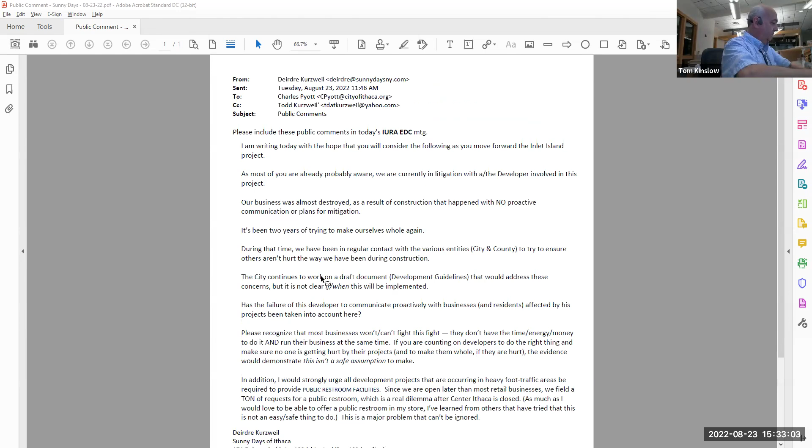Jeffrey. All right, is there more after that last line? Has the failure of this developer? Oh, yeah.

Okay, I've read the letter. Doug, Charlotte, are you guys good, give me a thumbs up when you're good. Good. Okay, great. Charles, let's make sure it's added to the record for the meeting and shared out accordingly.

Just before we go to minutes, does anybody on the committee have a comment or a response? Question? No. Okay, great. So we'll move forward then to review of the meeting minutes from July 19th.

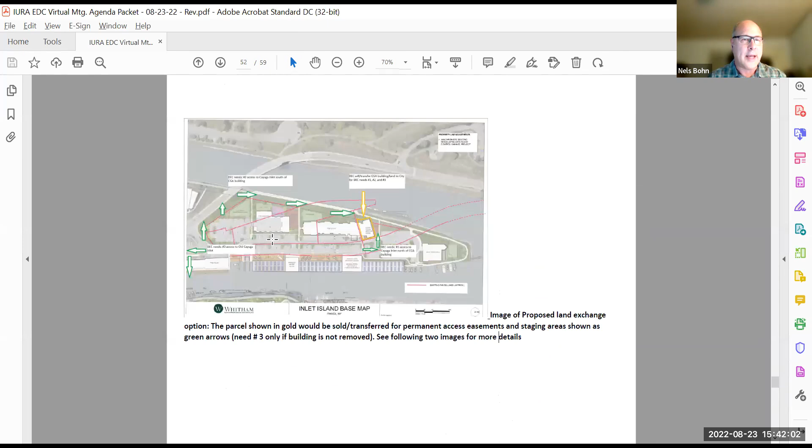Sure. So near the end of your packet, unfortunately, I didn't put it in sequence. But there is, I think it's on page 53. Charles is moving there. Yeah, those images, Charles, right there. Yeah, so on page 52 and 53 of the packet are some conceptual plans

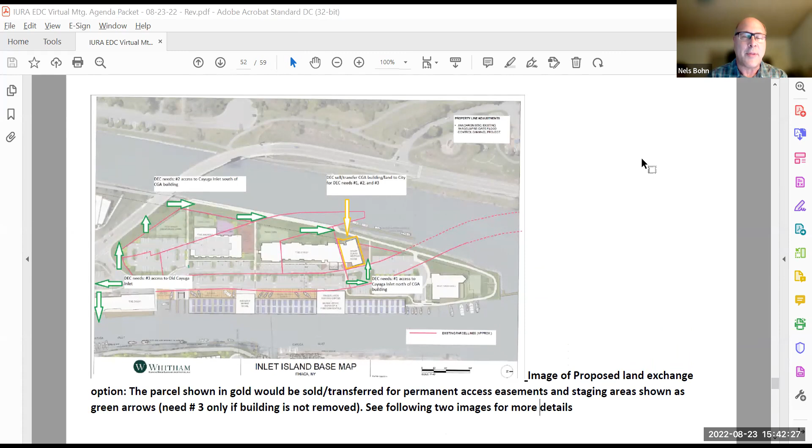which were utilized in discussions with DEC about how could the city acquire the property where the Coast Guard Auxiliary licensed the building for incorporation into the project. And so you can see on this plan that the yellow bounded area is essentially where the building is now. This is superimposed over an early version of the development program. And that DEC is open to transferring that property to the city for inclusion in the project.

They also have some of their own objectives they want to accomplish, which is to provide some logistical support for their maintenance of the flood control channel, as well as for some of the dredge activities that are proposed in the near future.

So conceptually, you can see here the boundary lines, where that boundary site is, where there's a yellow arrow going down from the top. That's kind of where the building is currently. But the triangle of land that the DEC controls goes north towards the point in a triangle fashion. You can see where those little green arrows are on the right-hand side of the image, showing where that triangle is. Charles, if you can advance to the next image on the next page, it'll show it in greater detail.

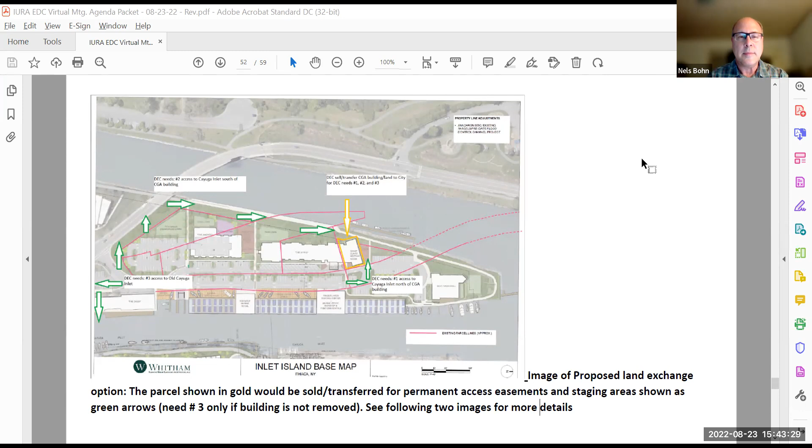So again, now we're looking at the island looking north, with the flood control channel on the west and the barge canal on the east, although we're only going as far east as Taughannock Boulevard in this image. The yellow boundary is the current building license to the Coast Guard Auxiliary. On the left-hand side, shaded, is the 25-foot wide DEC maintenance easement that runs all along the flood control channel. At the very northern end of this image is where the Boatyard Grill is, with the parking lot between the Coast Guard Auxiliary and the Boatyard Grill.

So what DEC is proposing — well, I should say they're open to a transfer of property at a fair exchange of values. Oops, what happened there? We shifted around.

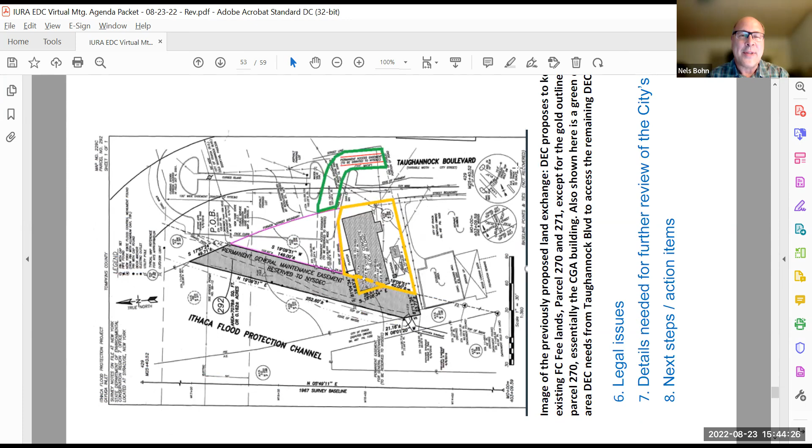What they would like is to retain a portion of the site for logistical purposes and convey the yellow bounded area to the city. They would also want any encroachment of the existing building into the easement removed, which would probably require partial or full demolition of the building, so they'd have a full easement area open and unimpeded. Secondly, they would gain an access right somewhere else on the island on the barge canal side for dredge purposes, which would be on city property, not developer property.

So this discussion has been moving forward positively, and I think it's likely we can come to some agreement, but there are details that need still to be worked out. The state also has a process for property transfer, so there's a timeline associated with this once conceptual issues are agreed upon. But generally speaking, the DEC indicates that there could be a fair exchange, which may not involve a whole lot of dollar exchange, if the value provided to them is equivalent to the value of the building.

In other words, by removing a portion of the building in the encroachment area and by the city providing an access easement to the barge canal system, there may be a very close to fair — a $0 exchange, or a very modest exchange amount. So that's a positive aspect.

The questionable issue is making sure that the DEC-acquired portion of the site doesn't somehow detract from the overall development of the island, because their interest is in logistics and maintenance issues, while we're trying to upgrade the entire experience of the island. So there's a little bit of a potential mismatch there, and we're trying to make sure we can work out those issues.

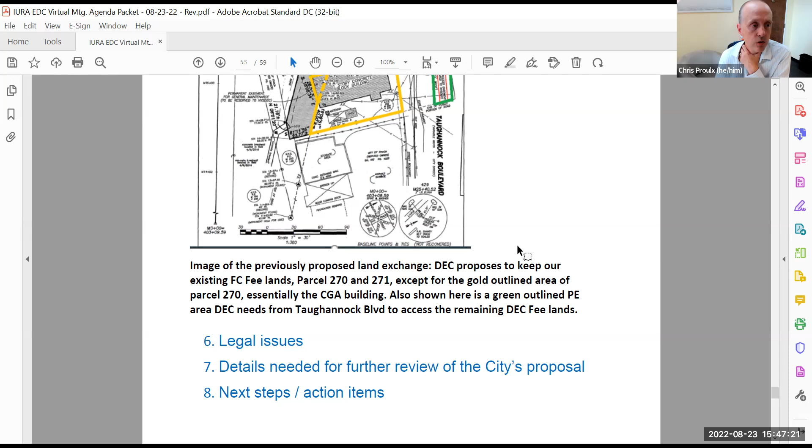So can you just clarify, with everything you just said and the image on the screen here, who owns what currently of the gold and the pink? Charles, can you bring that down a little bit? Okay, so the state of New York owns the entire yellow area of the site boundary, as well as the purple area. So it becomes a very tight triangle — wide where the building is, and it comes to a point at the north. That's the parcel we're talking about when we're talking about the Coast Guard Auxiliary parcel.

Okay, so the state owns that, and so there's not really an exchange here — what they're willing to do is sell us the yellow and retain the pink or purple. Correct. But they would offset the purchase price based on the cost to remove the infringement into the easement, that portion of the building that intrudes into the flood control channel, and also provide recognized value access to another part of the barge canal through city property at the southern part of the island.

There's also a former building foundation just south of the marine building, not detailed on this plan, shown just immediately south of the Coast Guard Auxiliary property, which also infringes into the easement. It's only a foundation wall at this point, but that could be another value to the DEC to remove it from the flood control easement, because they essentially try to treat the flood control easement area as having no vertical features at all, just grass.

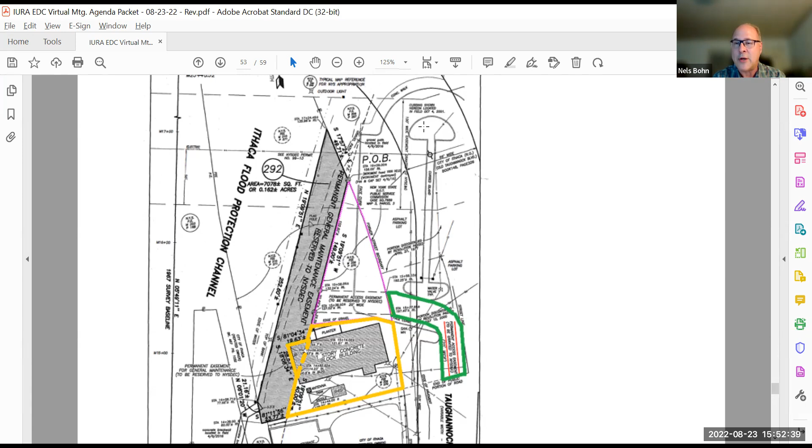Do you have a timeline? I know we're dealing with the state, so it's unclear, but does the group working on this feel there's a working timeline, or is it still obscure? They got back to us with some detailed proposals just last week, and I think we can respond - we did respond that there were some concerns about one aspect of their proposal. But we are going back and forth, and we've had very good cooperation from the regional director involved in the discussions. I think we can make progress fairly quickly, given that it involves a state agency, a municipality, and a developer all in the discussions.

Okay, great. Let's give the development team a chance to chime in here on anything related to this aspect before we go look at your program in depth. I don't know, Steve, I know you've been involved in this too.

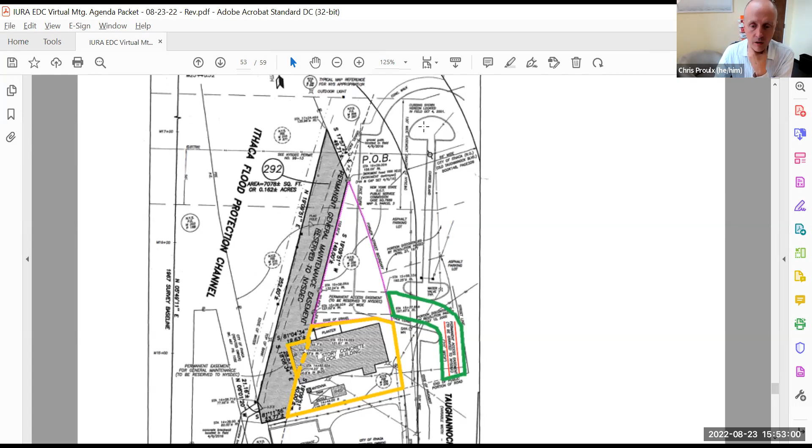Yeah, there are a couple of things. I think it was understood in our meeting with the state and the DEC that lopping off a corner of the building really wasn't feasible, and that essentially the whole building would have to come down.

And the easement, certainly as I envisioned it, and apparently this is maybe an issue we have to discuss with the DEC. As it exists now, there's already a curb cut and parking there, and the use of the easement is for access. If the DEC plans to use that parcel and remove that whole triangular spot, that essentially removes egress from the Boatyard Grill, let alone a bunch of parking, then we have a problem.

I kind of doubt that's really what they need to do, and I'm confident they'll work with us, but that commitment would have to be clarified before we could proceed. The building itself would have to come down, and that has a bearing on the value of the property, and there are a lot of negotiations before the city would even commit to transferring it to us. That also presents a timeline issue as well as a planning issue, in terms of what we can actually do with the site.

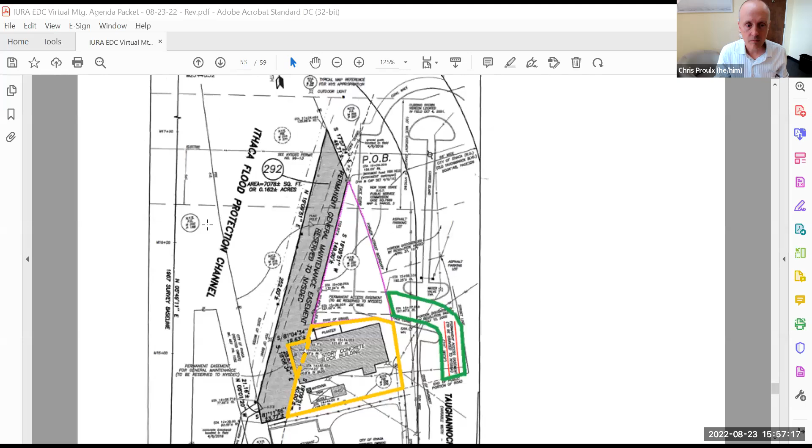Okie dokie, so let's then move to C, unless there's any other questions on B at the moment. It sounds like maybe the best thing is to turn it over to Jacob. Are you going to drive us through the changes to the submission? Is that what we're going to do here?

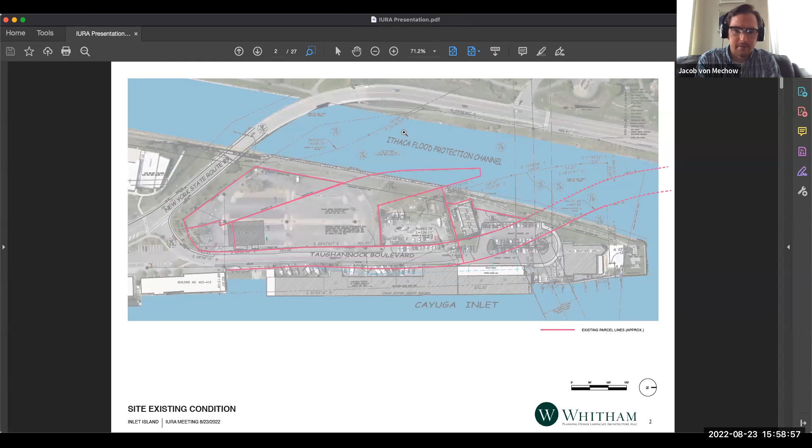This first slide shows some of the existing property lines, which are obviously a bit out of date, given that they predate the Ithaca flood protection channel. But for reference, they show the general footprint of the parcels that are for sale on the site and the existing Taughannock Boulevard right-of-way. Next slide.

So the main constraints, as many of you are probably already aware, are the New York State DEC easement for the flood control channel on the west side of the island, and then also the NYSEG easement, which is also a fairly major legal constraint as well as a physical constraint with those existing overhead power lines. These are some immovable constraints on the site. So next slide.

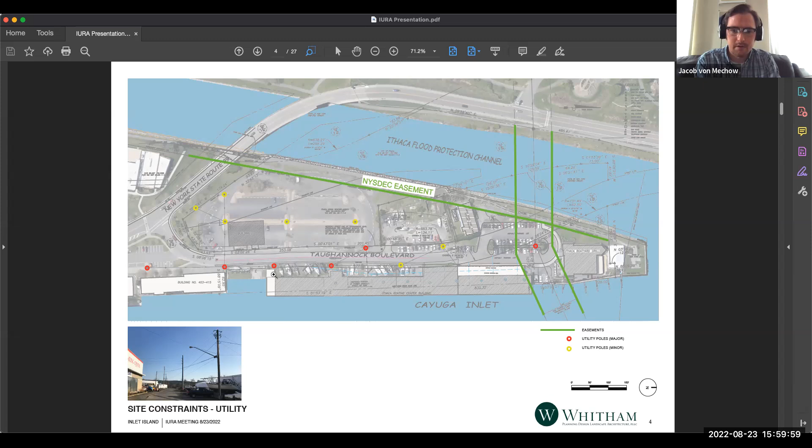We also have some infrastructure on the site that we are currently operating under the understanding is not financially feasible to relocate—that's the utility poles shown in red. However, there are some other utility poles in yellow that we think are simpler to modify or work around. But the ones in red are probably not going anywhere as part of this project.

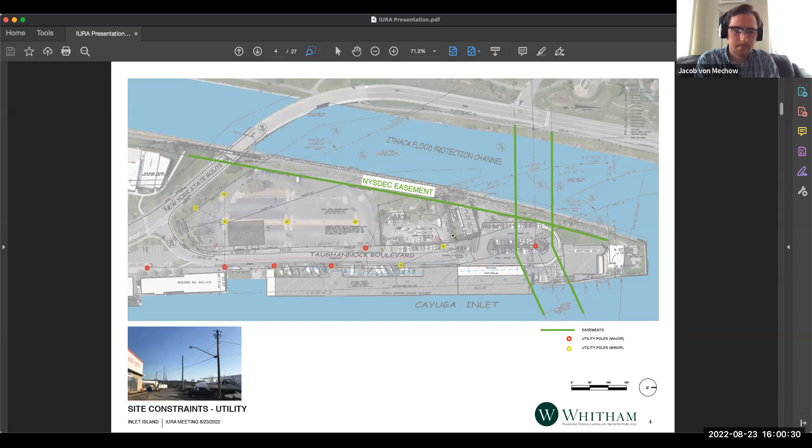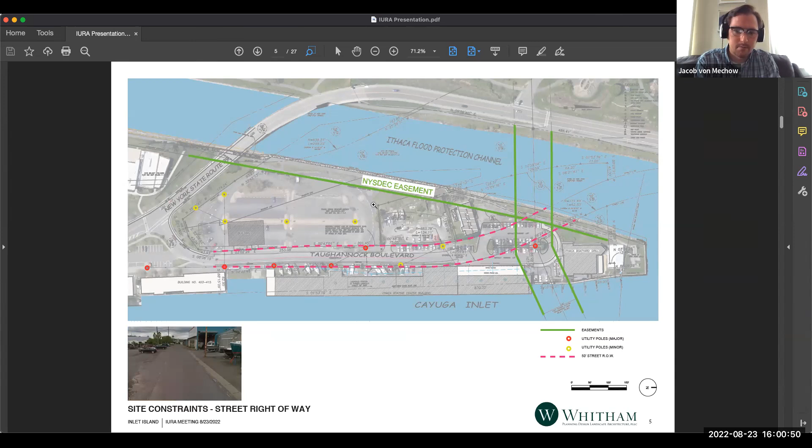Those poles flanking Taughannock Boulevard create a real constraint to the width of the road and its alignment as it enters the site on its existing footprint. This is the 50-foot street right-of-way, approximately—I say approximately because it's not consistently 50 feet wide. That's the standard city right-of-way for a street, but the old Taughannock Boulevard right-of-way doesn't follow this. Just for reference, this is the shape of it.

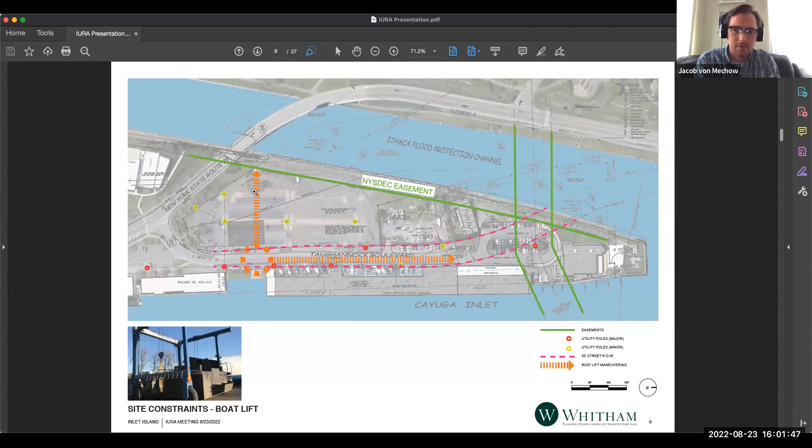We also have some operational constraints. One of the main goals of the development is to maintain and not impair the existing working waterfront operations of the boat yard and boat storage shed. The lift itself has real width requirements for where it moves and operates. It needs to be able to make its way up the existing Taughannock Boulevard to the maintenance shed located right there. We're also showing an east-west arrow indicating where, as we get into the site plan, we need to move boats for temporary surface storage.

As we just discussed, the DEC access and staging area is shown—this is approximate and still in conversation. The area below that, in blue, is space necessary not just for the DEC access but also for emergency vehicle turning at the end of the right-of-way, and that's incorporated into portions of the parking lot that exists at the north end.

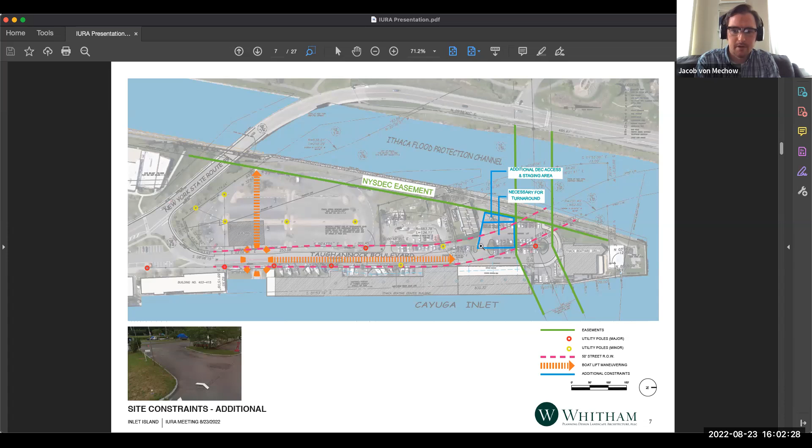So we're anticipating that those constraints provide us with a remaining available development area, shown in purple, that's left over once you account for all of those very real constraints that limit the development area here.

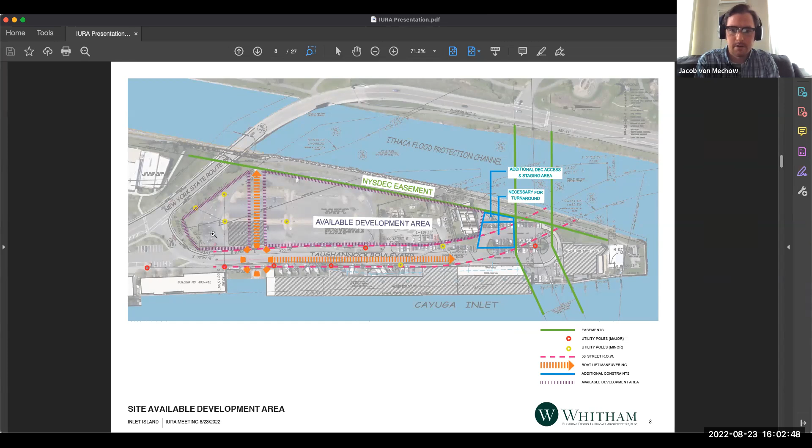With that in mind, we have some changes to the conceptual development plan. As you can see, a lot of this is very similar to what we showed before. However, we've made some adjustments to some of the drive lanes and footprints.

One of the major changes is the demolition of that existing building on the DEC parcel, and how that impacts the hotel building, or what we're calling 'the stays' currently. That footprint has shifted a little to reflect an ability to move further north, opening up more space toward the south end, and also some shifting of the second half of the building closer to the water to add a little more interest to the overall building mass and footprint.

The anchor building has also been shifted a little bit. We have Tom Kinslow here from Alt—they've been working on some preliminary programming and design for floor plans for the INHS building, which we're calling the anchor here as just a temporary label.

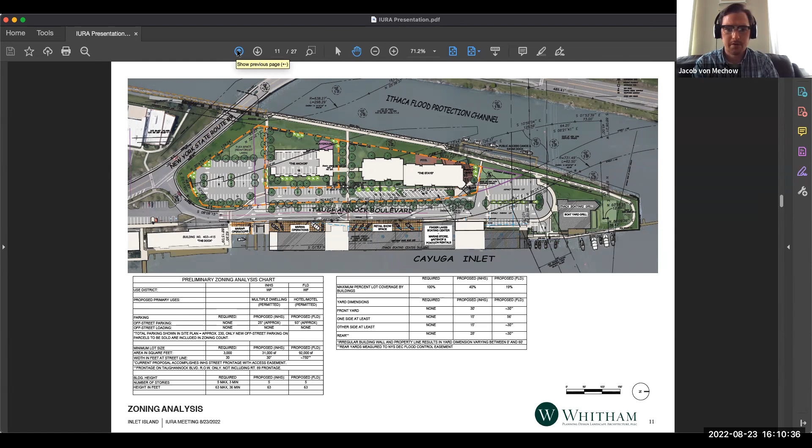One other thing I would point out: in previous plans, we were showing solar panels on the roof of the boat shed building. After a feasibility study, it was determined that the existing structure was not going to accommodate those, so we're looking to offset that with off-site investment in solar. Unfortunately, the existing boat shed structure just won't accommodate solar.

Nels, I think I see your hand raised—is that what that is? I just wanted to clarify, you mentioned in the proposed pedestrian improvements, it seemed like some of the lighter colored blue, which was the proposed improvements, went along the existing waterfront promenade trail. Are there proposed improvements in those areas, or is that just identifying that, or maybe my color sense is a little off, but it seemed like those were areas that were light blue.

Yeah, that's a good point. There is, on the west side of the site, particularly along the top of that seawall and by the existing boat dock, the floating dock, an existing trail. However, it's more of a rudimentary stone dust trail that is not particularly well maintained, but it is there and it is serviceable, and you can use that to connect from the asphalt waterfront trail extension near the gym building, underneath the bridge and up all the way to Lookout Point. So that is an existing connection.

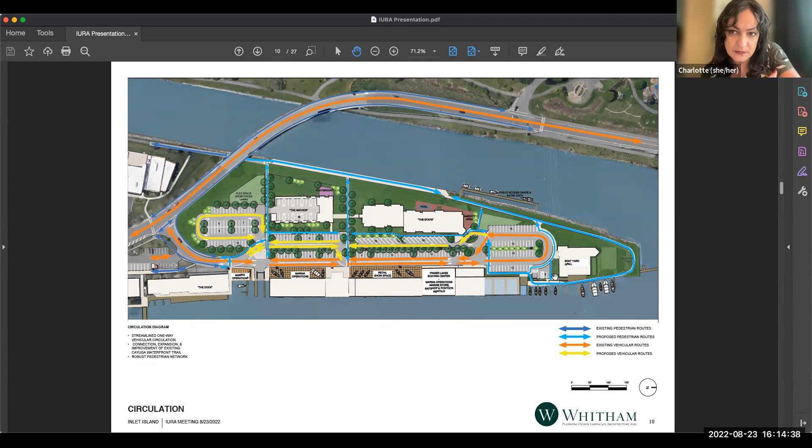We had shown some additional space around the exterior of the anchor building as public amenity space, but as Lynn said, there's nuance to what can be public and private depending on ownership and control. So at the moment, we've backed off from getting too specific in the programming and design of those spaces until the programming and function of the buildings is farther along, as far as where door entrances and exits are and who has access to what. But to your point, Charlotte, yes, we had shown a public playground, and we're backing off that until we fully understand how much we can give to the public and how much is inaccessible in terms of program.

Okay, yeah, thanks for the clarification. I know we looked at a lot of versions, so I wasn't really sure, but I understand the position. Doug, I see your hand.

I think planning staff raised this question too. I just wanted to understand why, from the original plan, the buildings were all in alignment and now they're shifted off one another. It seems like there would be benefit to having more open space on the flood control side than between parking and buildings.

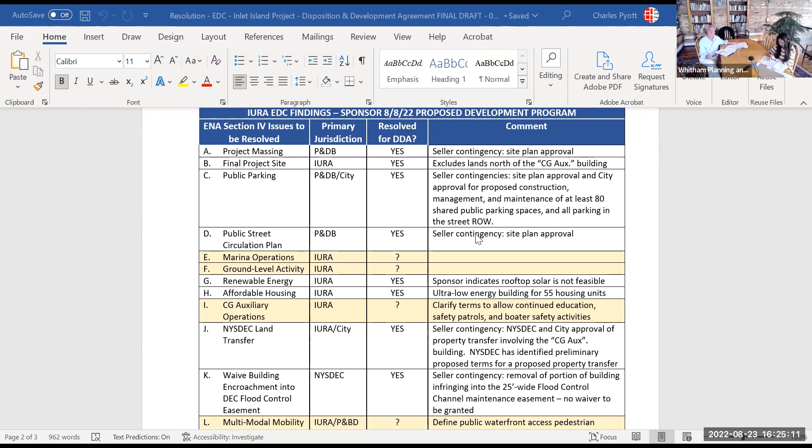We understand there were preliminary concerns raised, which we shared, about preventing parking wars by having segregated parking. We've had discussions with an entity similar to ParkMobile that could do a gateless parking system and manage it for public access. All of the parking would be public access, with the rate structure and enforcement through a gateless system where businesses can pay in, helping cover the cost, and get a chit or whatever at the entrance.

If, for example, it's the boatyard, however that's going to work—it's obviously not finalized, but it would be coordinated with the city. I propose we have discussions about how that could be done. If enforcement is done by the city, the city can collect the fees on that, all of which would have to be worked out. It was an idea to prevent the parking wars that the current system is designed to cause, as it works now.

So Nels, you're satisfied that meets our requirements for at least 80 shared public parking spaces and manages the city's prior commitments on the island? Yes, but it will require that the city actually agree to the method of managing the parking in any parking located in street rights of way.

Okay, right, because the parking management would cover both the street parking as well as public access on the site itself. Right, which largely I think is actually a good thing—one consistent system across all the parking on the island seems like a good idea. It doesn't have to be just on the site either; it can extend to the rest of the island too.

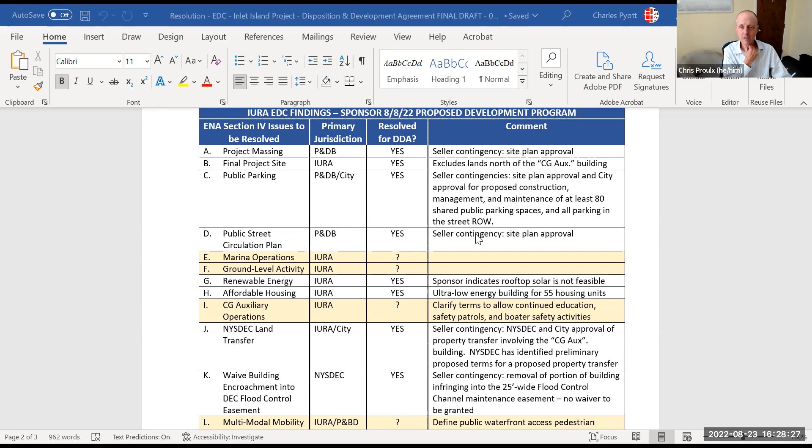Okay, so Marina Operations is the first area where we have a question. I think my big question is it's still a little unclear to me, and it was alluded to in the presentation, what boat storage would remain on the parcels of this project—where, when, how—and does that interrupt any other things that are planned? Maybe you guys could clarify that.

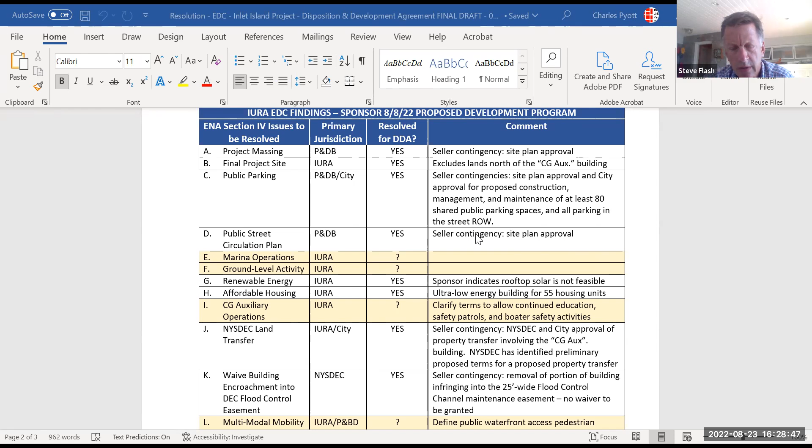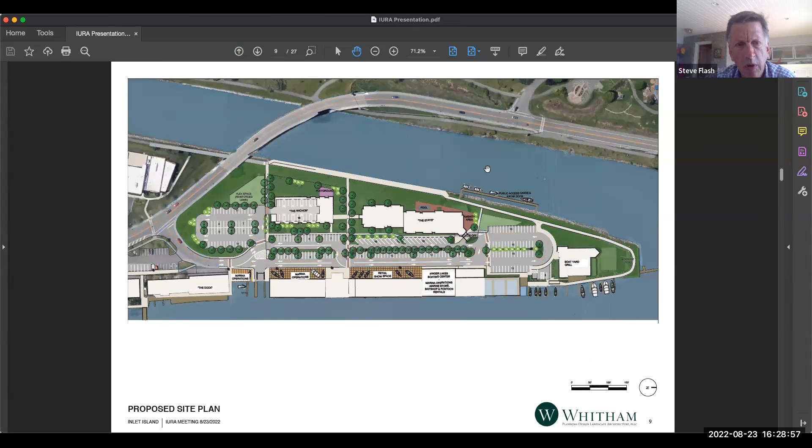Nels, do you want me to talk about that a little bit? Yes. If I'm not sure who's got control, can you go back to the drawing showing the last site plan? We'll do that now. Okay, so there is one with a circle showing the traffic and the flow. Yep, there you go, that one.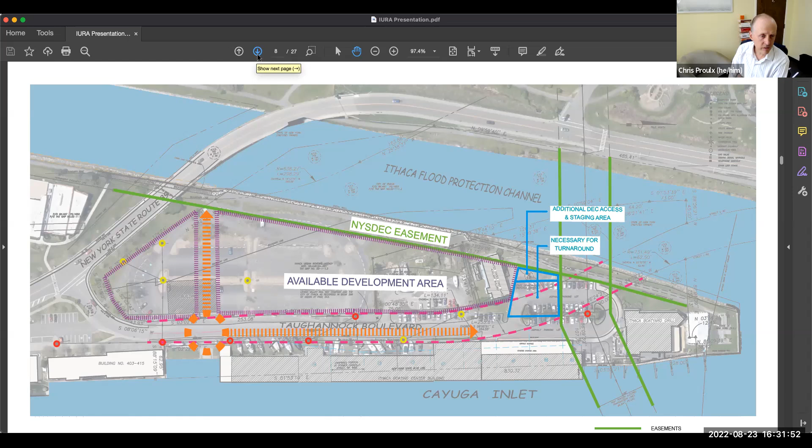Obviously cradles and boats can't be stored where they are now, or where there's a hotel or the anchor building. So how many boats in that reinforced flex space, if you go to the other diagram, do you think you'd be able to put there on a short-term basis, compared to what you do now? I don't envision using it particularly as storage, but more as a constant in and out in the spring and fall.

Given what we're trying to do as far as offsite storage, it shouldn't be more than 10 or so at a time, or it may be cradles, which are the frames that hold up the boats, or a truck or something occasionally. Accommodations can be made when we know, for example on Fridays when it's going to be crazy busy as far as parking or people, then we clear it out of there.

So you've thought about the fact that there would be increased traffic, both pedestrian and vehicular, on the site with these two developments, and therefore additional complexity to the timing and movement of boats in and out.

Yes, we have, and that's the reason the pedestrians are moved south, so they're not in the haul launch area. The south blue line comes here, goes around, stays away, crosses over right there. Also that's the reason for the two-way path just east of the anchor building, a little north of Marina Operations — so cars can go around if we're operating in that orange back-and-forth area.

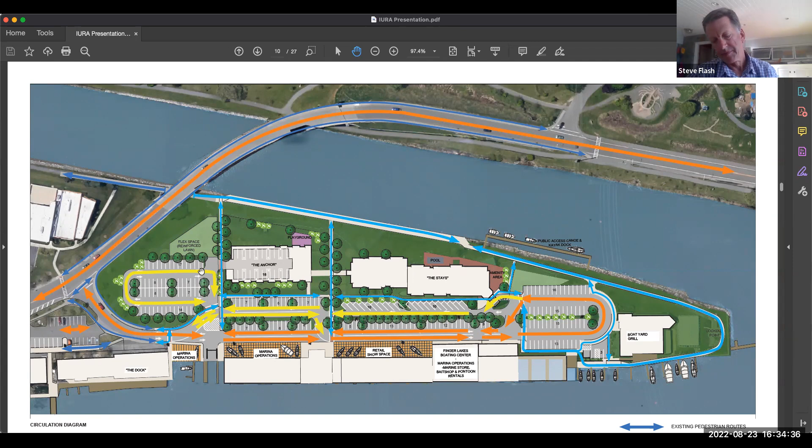My question to you would be, in terms of converting this from a question mark to a yes, I guess it's about knowing what language we'd want in the DDA, if any, around this. Yeah, I think defining the location, clarifying what you just said, Steve, in terms of memorializing that change from the current conditions with lots of boat storage and cradle storage to what you're proposing, is one of the frameworks that could move this to a yes.

I think there were some other related issues related to the boating center — there were some discussions early on about the solar, which we've discussed, but also an effort to upgrade that boat storage building, which has some pretty large oxidized roof panels, looking at maybe an overall upgrading of the visuals of the building. I know you've done some improvements in terms of landscaping and street frontages on the building.

And then there was a little bit of confusion about what was going on at the very northern end, where you said you were taking down a wall but keeping another wall or something like that. I can explain — if you pull up that drawing again, the last one. Just real quick, up at the north end in the boathouse, down a little bit from there, right?

Yeah, right in there. Currently there's a shed roof that comes out parallel with — where that parking is — that shed roof extends over the parking. We would remove that shed roof over the parking, so there's actually more parking there. The wall under the shed roof would be removed or made less of an obstruction, so a pedestrian can get some sense of view to the water through there.

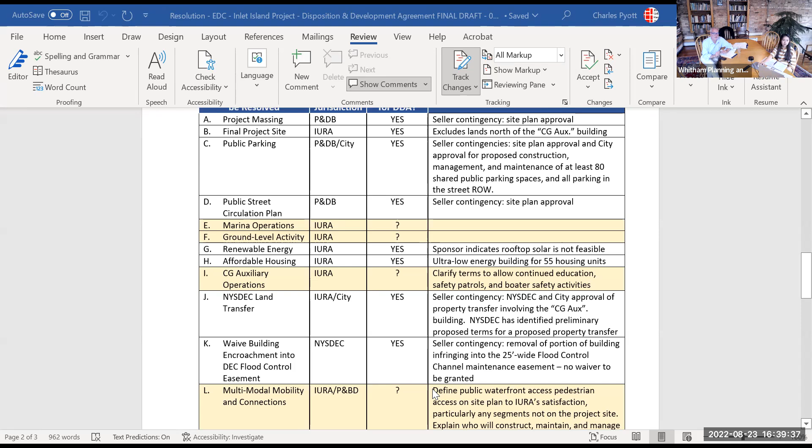Scott, or do you want me to take this? Why don't we put up a site plan and we can go through the ground level activities? Steve, if you talk about the buildings, and then we'll talk about moving around the site.

So the major increase in ground level activity is going to be cleaning it up so it's not this rather intimidating bunch of boat storage equipment where the stays are right now. And as far as taking advantage of it for people who aren't staying in the stays or at the anchor, there's already a lot of activity that this is going to increase access to—not only the docks, which are private now, in essence, with the Coast Guard having locked it up.

That would become a public access area, and just generally the whole opening up of access to the water for a walkway. And it would help the commercial activity that's existing now—between the bait shop and boat rentals, and hopefully the docks. That's kind of the primary of what we're doing here.

So clarifying access, both vehicular and pedestrian and bike access along here, is one of the big goals of the project as a whole. As we all know, it's super confusing down there, and as Steve says, rather intimidating if you don't know it well, particularly if you're walking or on a bike. So we're continuing to look at ways to make it really clear—the access to the water through the site, to the boatyard grill, to the commercial facility, the marina facility, as well as the newly reopened dock.

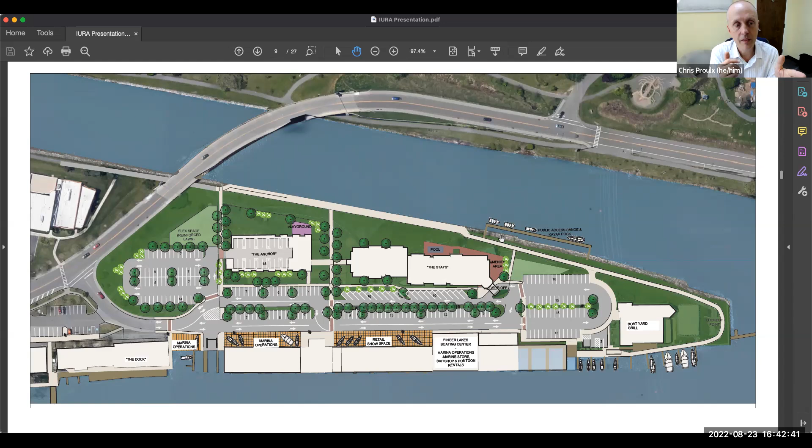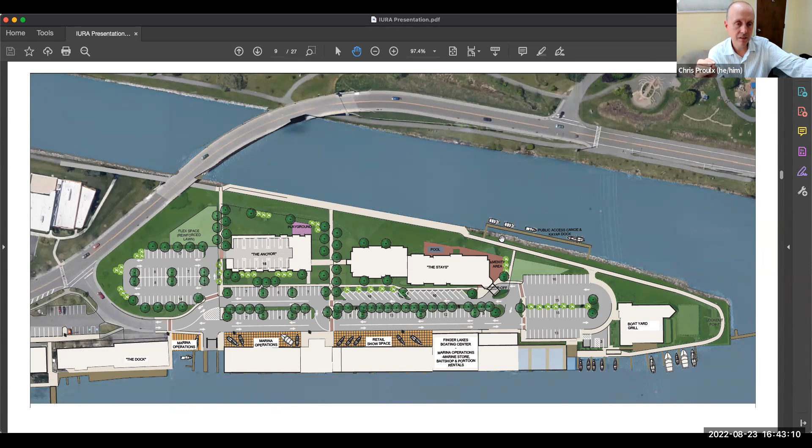So it kind of sends this message that maybe I'm not in a place where I should be. I think of other places that have been upgraded, the north part of Treman Marina, and even that trail to the farmer's market that used to be like a herd path. You make those things clearly the public is invited, and both of those areas have had tremendous use. So you're making investments elsewhere on the site for the connections and the wraparound from Lookout Point, which are awesome. But the risk is that we're left with this discontiguous piece that people are still unclear about - do I belong here? So that's one comment I would have.

The second is, I'm a little worried, and I know Common Council raised this too, that the nature of the hotel and the anchor, if there's no clear way for the public to access that - and I understand the issues around the anchor - but you have these restricted areas, the playground, the pool, amenities for the people using those properties, and it sends a mixed message about whether the public is welcome on this site, or whether I'm interloping in a private property situation. So having definitive things designed to attract the public to the site can overcome that, whereas the passive uses make it more difficult in my view.

But let me open it up to the rest of the committee for additional comments. I thought I saw Doug's hand at one point.

Yeah, I would totally agree with you, Chris, about the canal there. Talking to Rick Manning of Friends of Stewart Park, the waterfront trail is 10 to 12 feet wide in most places. I think we should see it at least that wide along that whole western side. And I'd even like to see the crosswalks from Taughannock Boulevard that wide across rather than just sidewalk width. I think that will make much better public access to the waterfront there, and better connections back over to Buffalo Street and the waterfront trail going across there. My wish list, in addition to other public amenities, would be a public restroom and access to some kind of cafe that the public could use there.

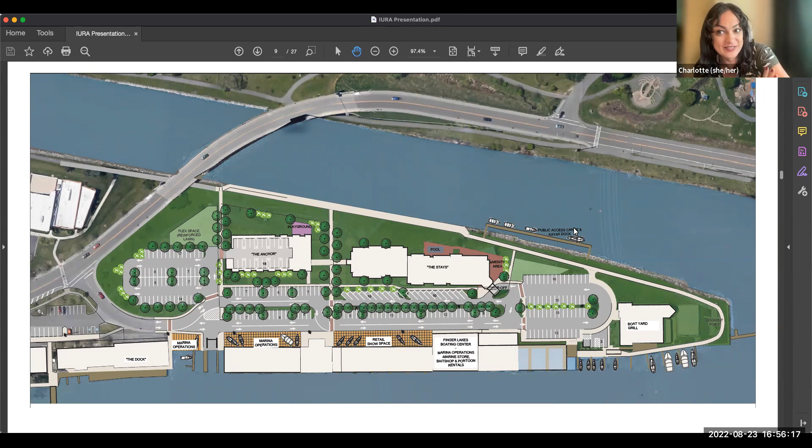Very good point, Charlotte, as we've had lots of public comment from them at prior meetings. It'll just loop back and delay it. And on the previous point, I want to move this forward because overall, this is much better for the community across the board. So the more we can move it, the better, I think.

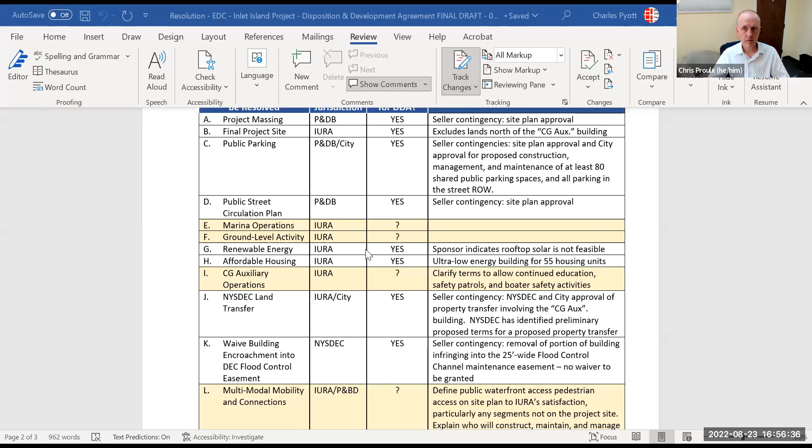Great, so let's just look at L and M. Multimodal mobility connections. Some of this is what we were just talking about with the Western Promenade. And then the second question, Nels, correct me if I'm wrong, is around who is actually constructing and paying for these. Is it the city or is it the developer or some hybrid?

I think it would benefit the understanding of the site plan to define what areas of the site are actually public access and what areas are clearly privatized. There's some suggestion that the walkways connecting Taughannock Boulevard to the waterfront trail are going to be available for public access, but I think it's anybody's judgment on what that means in practice. Is that just the sidewalk or is there a wider swath? Are there other issues like that? So more of a clarification.

And again, the terms of the ENA suggest that any improvements outside of the right of way are the responsibility of the developer. So anticipate, unless we hear otherwise, that those locations or connections would be the responsibility of the developer, both for construction and maintenance, unless we hear otherwise.

So Steve, I can't tell if you're talking. Yes, I was muted. The connections within the site that we are purchasing, or are you referring to something else? No, within the site, those connections going east-west to the waterfront trail from the Taughannock Boulevard area. Connections from the waterfront trail. Oh, you mean pedestrian connections going east-west? East-west, yes, right?

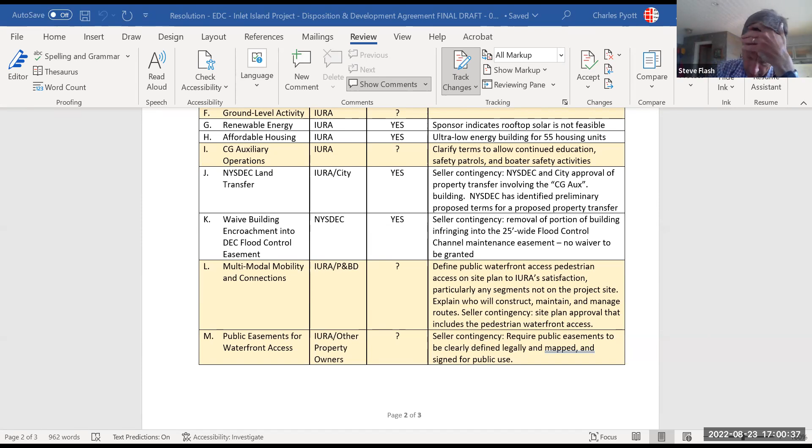Okay, and I think the answer to those questions could help us clarify L and M. So let's talk about the public right of way. So the ENA said what on this? Do you remember exactly which clause this is, Nels? I'm trying to find it.

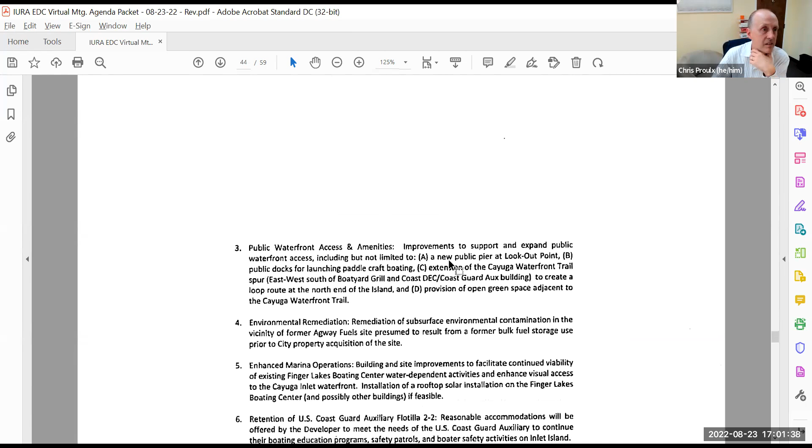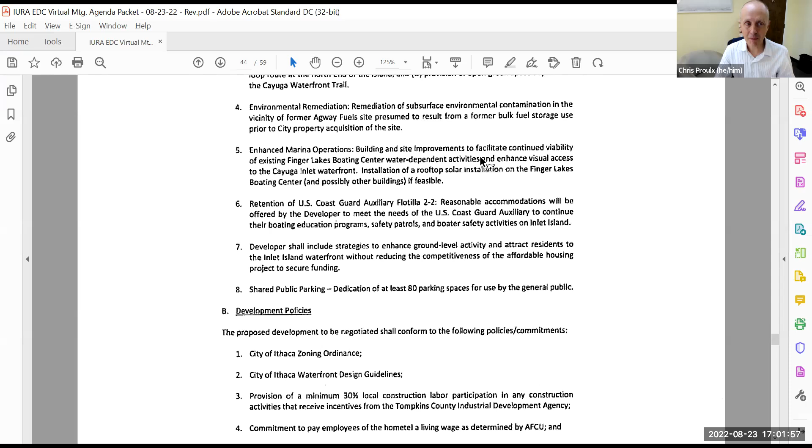Right, other improvements proposed within the road right-of-way shall be the responsibility of the developer. So this is 2C3, I believe - the essential terms and conditions, page 5 of 12. Yeah, and then it continues on to page 6, which is where I was just reading. Which seems in conflict with what's in the revised submission and what Steve just said is his understanding of who's paying for the improvements in the public road right-of-way. So we can talk about that here, but it may also require an additional sidebar to get clear on.

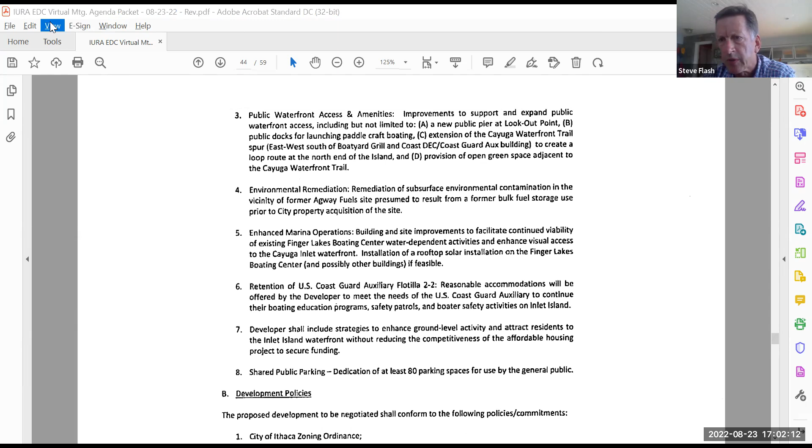I'm happy to take it either way. I guess I just want to be clear - if there's an improvement along the border, we have to put granite curbs or something, but we're not rebuilding a roadway. That's not something we can do. And that road - fine, then we will withdraw the drawings that show nice parking along the road, but that would require essentially rebuilding the road to city standards, which is not something - I mean, we don't own the road. We can't do that. It would cost millions of dollars, at least for a private person. I don't know how much it would cost, but certainly we're not budgeting for rebuilding a public roadway. I guess we need to be clear about that.

And I would suggest that the road does need to be rehabbed. We've been asking for some fairly basic maintenance for a long time. I think everybody wants to see the entire site upgraded, but I don't think we can commit the city to incur the costs of upgrades shown on the site plan that are located within the right of way. So maybe it's a matter of just withdrawing the phrase that the upgrades in the right of way will be expected to be completed by the city. I think it could be through negotiation, because the city does recognize that roadway has gone many years without improvement, but I don't think we can assume the city will undertake the improvements shown in the site plan that are located in the right of way.

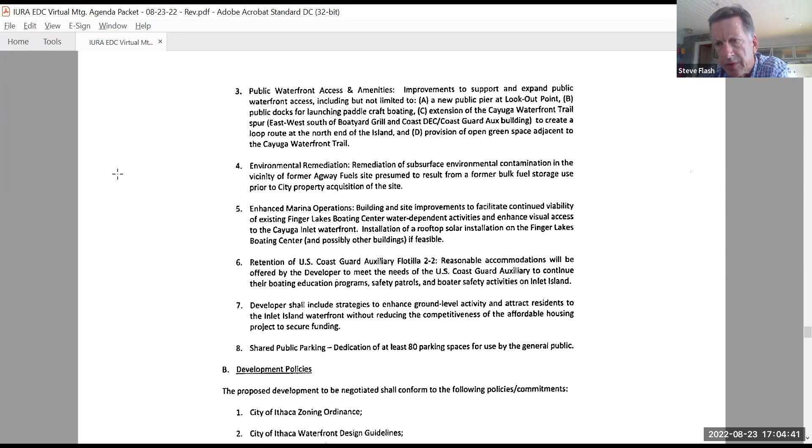Just to be clear, we have not altered or infringed upon the roadway, other than cleaning up the parking, I guess is what you would say, but we haven't done any improvements as far as our project itself - building a building that impinges upon the roadway. We've been very careful not to do that. If you want to move the roadway or whatever, that's obviously going to be the city's bailiwick. What we have shown on the site plan is sort of a master plan for what we would like the site to look like.

But the development portion could certainly happen and function with the road in its current condition, though in its current alignment it would not be ideal. It may require some additional curb cuts, although there's no curbs currently. But other than that, we could work around the existing road if the city never improves it. I think we can show that more clearly graphically.

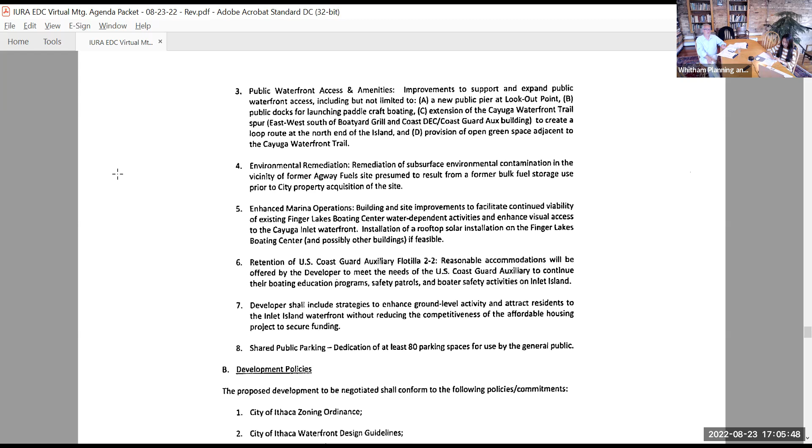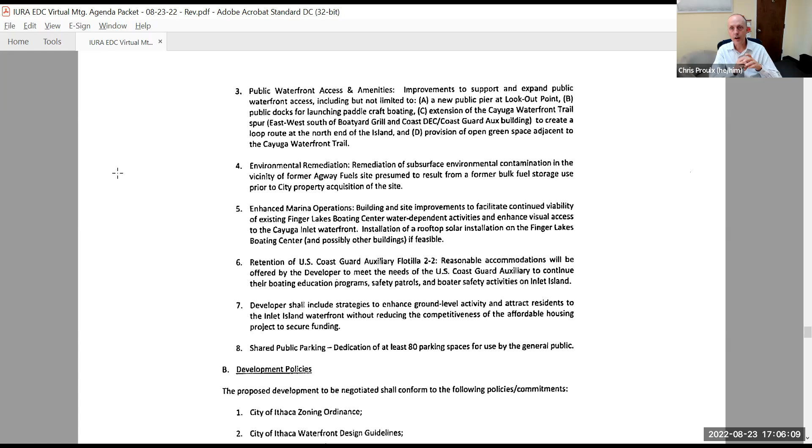Yeah, I think we should be clear. There should be a view connecting the last issue and this one, a view of the schematic on page 24 of our packet, that shows what the development would look like using the existing right of way, without this double loop road and trees in the middle. That makes clear what it would look like.

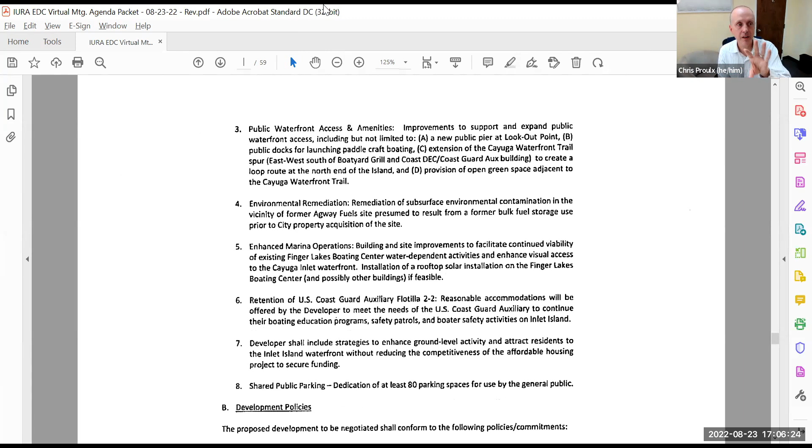So we just talked about the east-west connectors being the responsibility of the developer. But if there's anything residual after you take the major right-of-way out that you were expecting the city to pay for, figure out a way to create a diagram that highlights those with a color or something, so we know what those are. I think that would be helpful, Scott.

And keep this too, your idea of how you'd like the circulation and flow to work. But Steve's right, you're not in control of this, and you're not going to pay millions of dollars to improve this road. So let's make it clear what you're willing to commit to and differentiate it from what the city would have to do. That clarity would help us all. And we all know what that road looks like, so then we can figure out what to do about that from there.

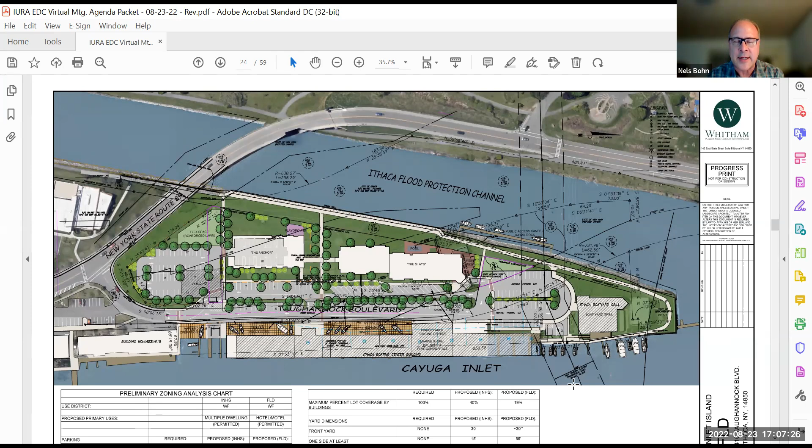Okay, I've lost a little track of where we are. Oh, the environmental cleanup cost is the last remaining item. Well, I think there was one more issue related to circulation, which was the continuity of the loop at the north end of the island. The trail seems to have just a tiny little gap in it right there on the site plan.

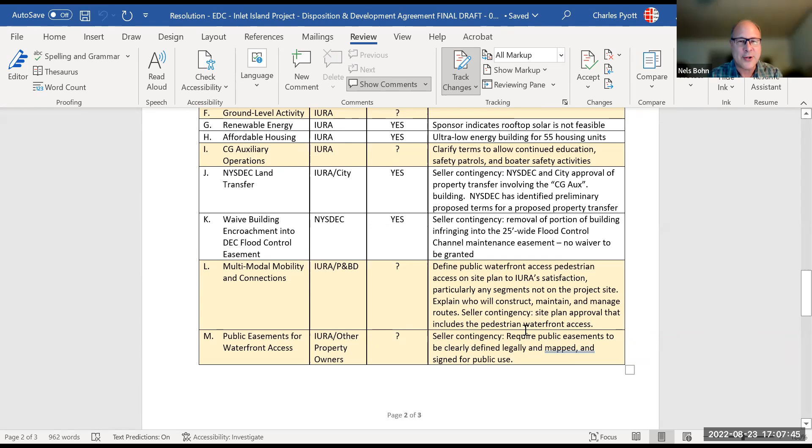Where's that? I felt more comfortable when they had the view up with the blue arrows. Yeah, it should, that one seemed to show it as continuous. Let's go back to that image.

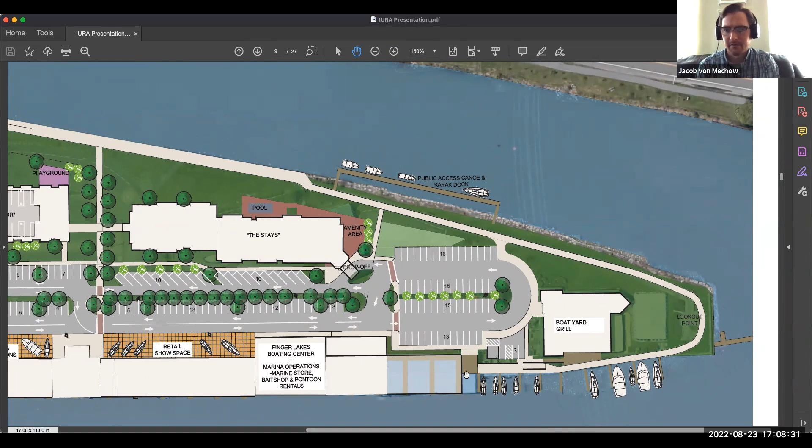So that area is a complicated little design problem. If you can zoom in to that portion, a lot of the Boatyard Grill's current functional back of house happens right on that side, between that and the Finger Lakes Boating Center. There's dumpsters in that location, some existing parking spaces, and it's also where they get deliveries for food, with tractor trailers backing up to that location. So connecting through that area would require some modifications and reorganizing of elements to make it work. But we think it's possible, and we think it would be a big advantage to create a loop at this location. It's a site design we haven't done in any detail yet, but certainly that connectivity would be the desire.

Right, but where's the one with the blue arrows? Can you bring that one up? Yeah, that one. Oh, I see, so you're showing it, but right now it's discontinuous because you haven't figured out how that would work. We haven't moved into that level of design. Where is it discontinuous?

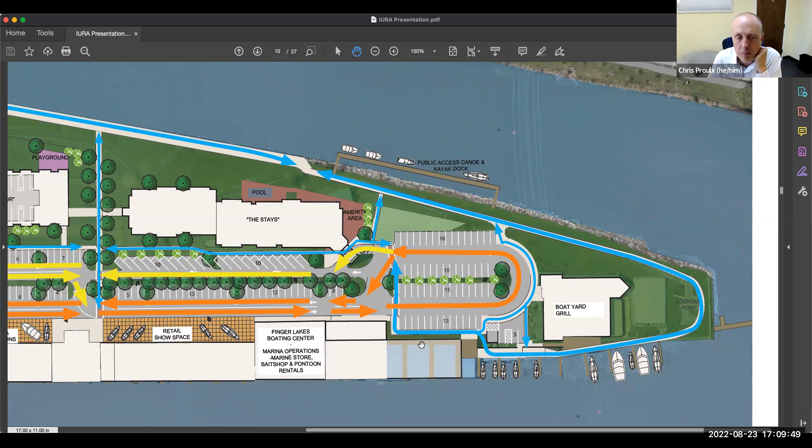So it shows like that blue that's there, between the dumpster and the area. It shows like it's connected, but what you're saying is physically right now it couldn't be connected without some other element. Oh, I see what you're saying. Okay, so the plan should show the movement of the dumpster, the new sidewalk, or whatever landscaping is left over.

That again is not at this conceptual schematic phase design. Right. A lot of that's already in place though, just so you know, except for right around the dumpster and by a reconfigured building shed area and going across the street or across the parking. Otherwise, most of that's there. There is already a route around the restaurant and a parking lot.

Oh, a sidewalk. Yeah, I think the issue is just if you're going to say you're going to have a continuous loop, it's got to be a continuous loop and it's got to be readily understandable to the public. How does that work? Where do they go? Where do they walk? And then agreed all around. Okay, so as long as we all agree that there should be a continuous loop, later design and stuff will work that out.

Totally agree with that, but also want to underscore the wider crosswalk towards the potential kayak boat thing. If people are going to be publicly bringing in kayaks, they're going to need wider than a 4-foot sidewalk to drag their kayak from the parking area down to that dock.

Great, Doug, yeah, noted on that. Currently we're showing all of the proposed sidewalks a minimum of 5 feet. I think that connection there is 6 feet. We could certainly look at making it wider, but 5 foot is the minimum for the sidewalk widths we're showing. But again, at the end of the day, one needs to move comfortably a kayak across there, and that'll be a goal that I don't think we've met as yet.

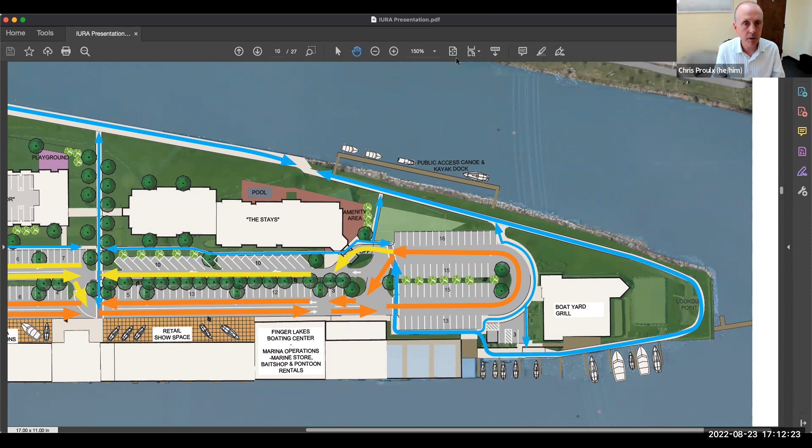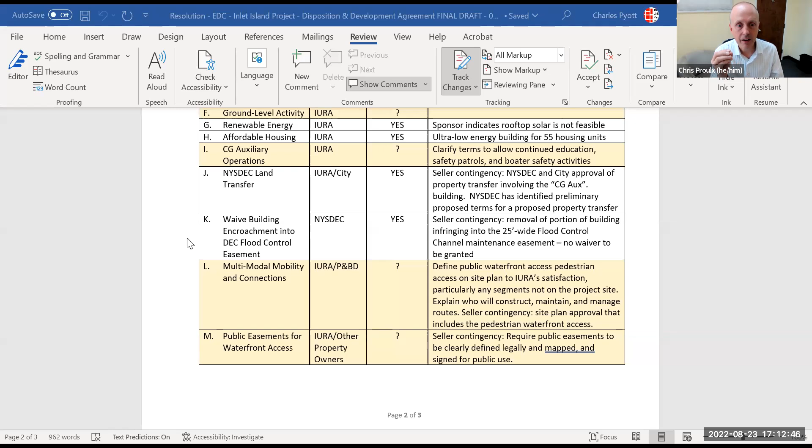Okay, really conscious of trying to wrap this up. I think the only thing on the environmental cleanup costs we wanted to clarify — we understand that you're taking the cost of the environmental remediation against the price of the land. I think we'll just want some clarification that we are paying for the legitimate third-party costs of that cleanup, as justified by a contract or an invoice or something, so we know we're paying for the actual cleanup cost and not additional project management time or other related things.

And because we're recognizing that this is an open-ended thing that we don't really know, we understand though that it's the city's responsibility. Okay, so Nels, I think we could probably...

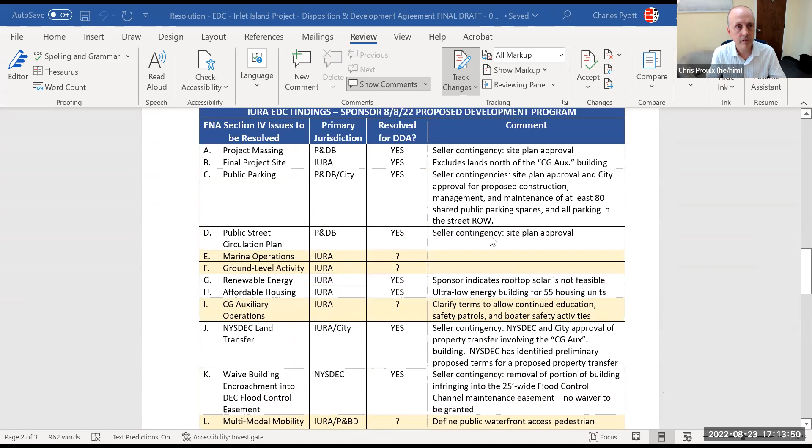The main need of this resolution is to request an extension to the timeline, which I know you flagged for Steve earlier today. I'm a little fuzzy as to what to do with this table based on all this discussion. Maybe it would be sufficient to simply say, whereas on August 23rd, IURA Economic Development Committee reviewed the sponsor's submission against pre-identified issues, resolved and noted additional areas to review with the developer, right?

Right, because I'm afraid that right now we're not going to get this table updated properly. That's my concern. Yep, I agree, we need a little more time to work out the details on it. But again, the action of the Urban Renewal Agency would be to grant a time extension so we're able to address the issues. So the table is not critical for that resolution — it's just the fact that we haven't reached 100% agreement on every issue yet.

Agreed. And then I think the resolved clauses could then still stand as they are.

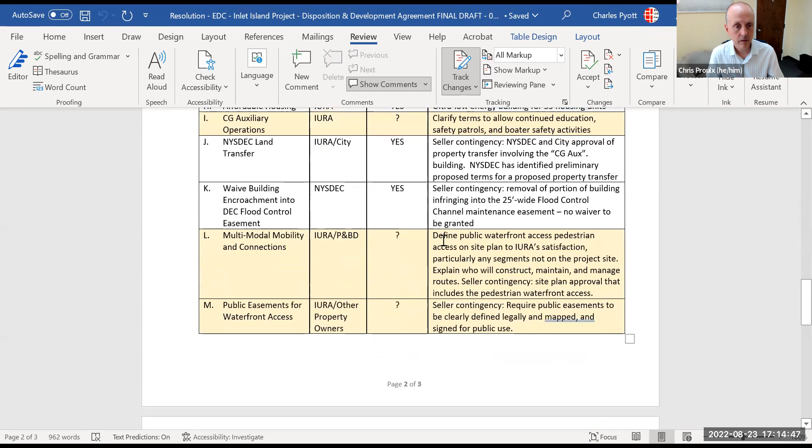My only concern, so I didn't catch this earlier — it requires a developer to resubmit development program materials at least 7 days prior to the next IURA EDC meeting, so they would have to submit by the 4th for a meeting on the 11th. I mean, to Charlotte's point, we want to get this over the finish line, and we want to have something we're able to look at on the 11th that we can say yes to. So I just wonder if that's enough staff time to work through any sort of questions between the developer and staff.

Did you want to talk about the level of commitment required? The issues that are raised by the DEC, getting that commitment from the DEC.

Let me address one issue at a time. I think Chris is asking whether the non-DEC issues can be resolved in a way that brings enough information to the EDC at the next meeting so they can make a final decision without going back through another sequence.

Additional information can be provided throughout the next couple of weeks. It doesn't have to wait to a deadline date, and we can work on issues as they come up so we can be ready. I think that would be the best way to work through these issues since there are several, some just a matter of language, some requiring significant thought on your part about how you want to respond.